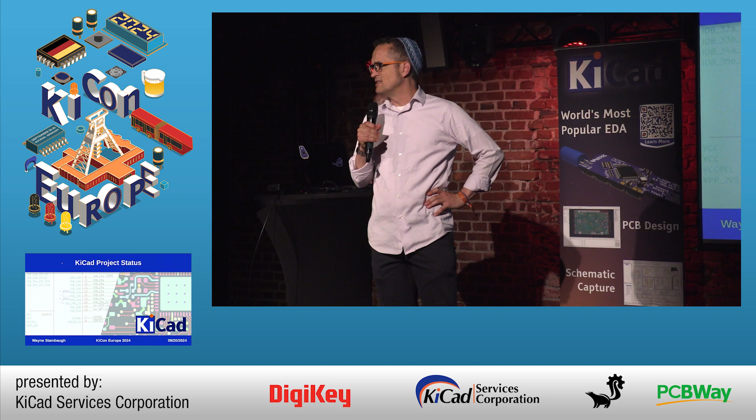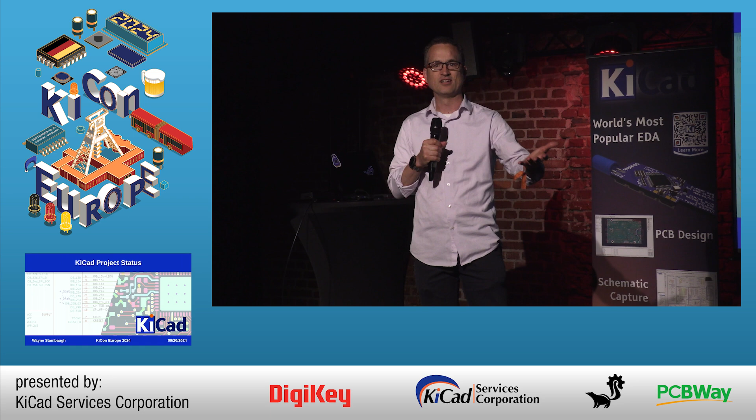Wayne is the KiCad project lead. If you saw his talk yesterday on bug reporting, I won't repeat the introduction, but I want to give a very quick overview. Wayne has been the project lead for a number of years. For those of you who are longtime KiCad users, you'll remember what the project looked like before Wayne took over and what it looks like today. This is not an accident. This is a planned and carefully worked on sequence of events that does not happen without a strong and competent lead on the project. The team, the community, everyone involved in KiCad is critical to their success, but without a leader who understands and facilitates this kind of interaction, communities can fall apart and disintegrate. So we have Wayne to thank for setting a strong, positive example for how to create a caring and nurturing community that can grow and meet the needs of all of us together. Please give a warm welcome to Wayne Stambaugh.

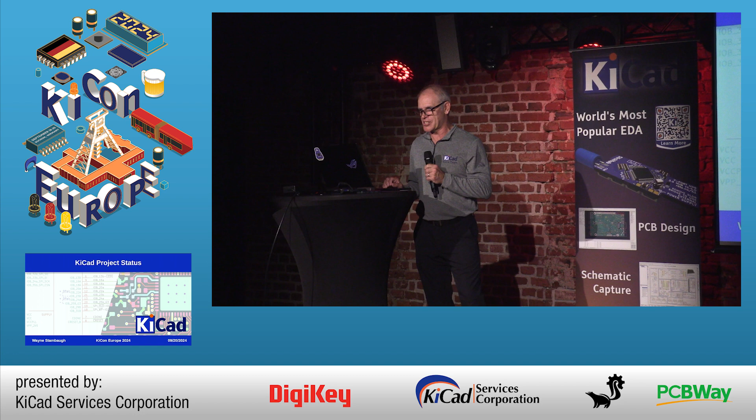Thank you, and thank you for the introduction, Seth. I'm not sure how much I deserve all that praise, but I do consider it a privilege to be in the position that I'm in, and I don't take that for granted. I think that's a lot of the reason why I've been able to do this for such a long time - I think it's now 14 years I've been the project lead. I really enjoy it, and I'm thankful to be here.

So today I'm going to talk about what's going on in KiCad. I've talked to a lot of you face-to-face over the last day, so some of this you may already know. If this talk looks familiar, it's going to be very similar to what I typically do at FOSDEM. The only difference is FOSDEM will be official, because by then version 9 will be out. We'll have probably a team meeting with the dev team to talk officially about version 10. So I'm going to talk about some of the features we're going to work on for version 10 that will be official. This list is just off the top of my head, so it's not quite complete yet - don't anybody panic if you don't see your favorite new feature on the list for 10.

So what's going on in the project? Unless you've been living under a rock, you know version 8 was released on January 31st of this year. That was the next major release in our annual release cycle. So version 9 will be released on January 31st, 2025, or within usually a few days of that. We had a year-end donation campaign and raised over $100,000 again this year, so that was successful again. That allows us to continue funding development and pay our development team to do their work. It also helps fund me to come to events like this, so I'm not paying all that out of my own pocket.

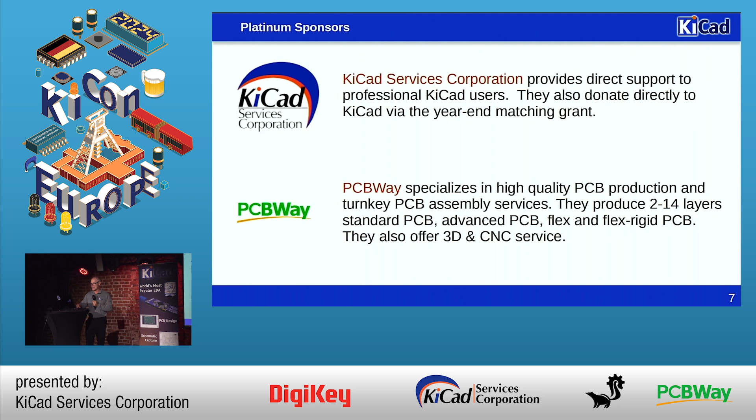So what's coming up for version 9? I want to talk about that a little bit. I want to first preface this by saying this is not a complete list. This is most of the major front-facing things that you would see as a user when you start using version 9.

This list would be 5 times longer if I included all the UI improvements, all the library improvements, all the documentation improvements that have happened during this development cycle. This is just a list of the highlights. Keep that in mind, because if you've used a nightly build, you'll be aware of some of this. Some of this you may not be aware of.

We talked about this a little bit yesterday with the Python bindings. This is an internal change - it's not front-facing, but it's a big change. We now have IPC support for the schematic and board editor APIs - it's a true API. We also have bindings for KiCad in Rust, and they're in their own separate repos on GitLab.

This one hasn't happened yet. I'm hoping it makes it in - one of our devs said he's going to get it done. One of the things we like to be able to do is let people reorganize their toolbars as they like to see fit. Right now, we don't have that support. wxWidgets has always been a little weak in that area, but we're going to try to get that in.

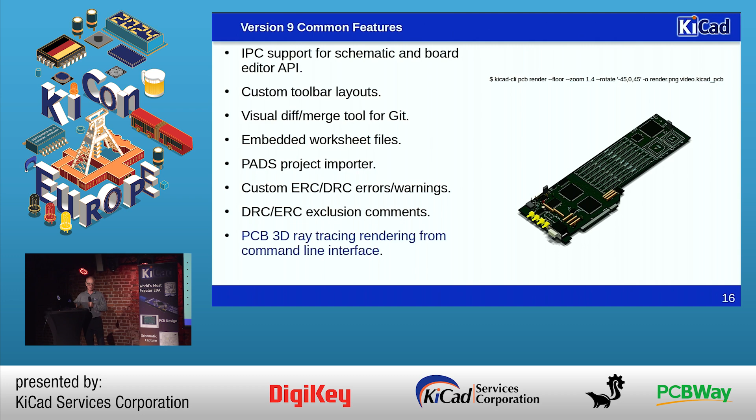So many of you are familiar with the command line interface. You can now do ray traced 3D models or ray trace 3D renders from it. Before you could just get the standard graphics, standard image file out. Now you can do the ray trace as well.

We now have a table editor, so we now support tables in all the editors: the board, schematic, symbol, and footprint editors. There's a table, and it comes along with a tool that allows you to do custom tables like you would be able to do in most other applications that support tables.

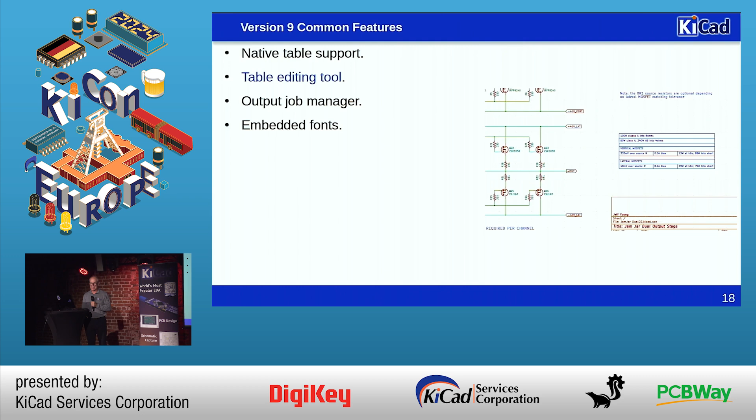This has been a long requested feature. The command line tools somewhat make this a little bit less needed because you can script, but some people like to be able to organize all their project outputs in a single place, click a button, and generate all your outputs in one shot. So there's going to be a new jobs tool in 9.

The other thing we've done is another thing that you can embed now are fonts. If you have a custom font that may not exist — the font issue has existed as long as computers with different fonts existed — if you have a custom font, on somebody else's computer you send them a document and you don't have that font, it doesn't render the same. You can embed fonts in all the files now. But like with the same caveat, keep in mind they can get rather large, so it's always going to be an issue.

So, schematic editor. What's new in the schematic editor?

There's now a synchronization tool, and you see it playing here. You can now synchronize the pins on a sheet with the hierarchical labels on the schematic, and it's bidirectional. So if you add a new port name to the sheet, when you open the schematic, it'll be there, and vice versa. You can delete them. So you have a single place, because in the past, for those of you who use hierarchical sheets, you know that you go down in your sheet, you add all your hierarchical ports, and then when you come back up to the sheet, then you place them. Now you can do it in a single place and they all get synced back and forth. So that's a handy tool.

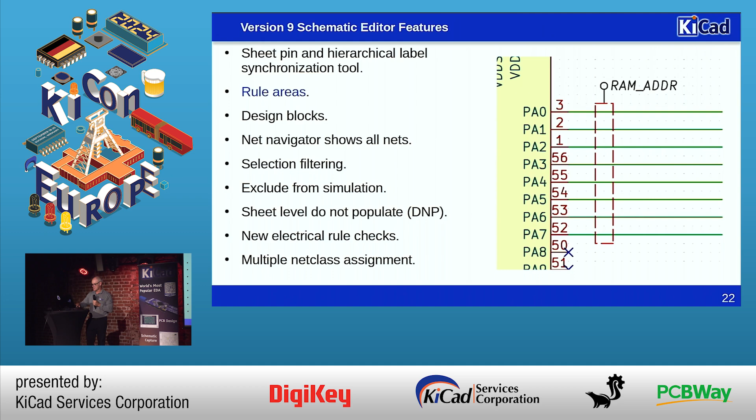Design blocks. This was just committed recently. You're going to be able to create arbitrary blocks of schematic blocks that can be arranged in a library, and then you can use those in all your designs. So you can have reference schematics for different pieces, bits and pieces. This is the first part of a larger goal — eventually those things are going to be tied. We're going to tie those to a block, a layout block as well for the board. So this is just the first step of that.

So originally the Net Navigator — there's a navigator that allows you to, when you have really deeply nested hierarchies with a lot of nets, follow the nets, which is sometimes difficult. Even if you highlight one, you have to navigate, and this allows you to do that. Originally it only showed the highlighted net. It now shows all the nets, so you can see the entire net hierarchy of your schematic.

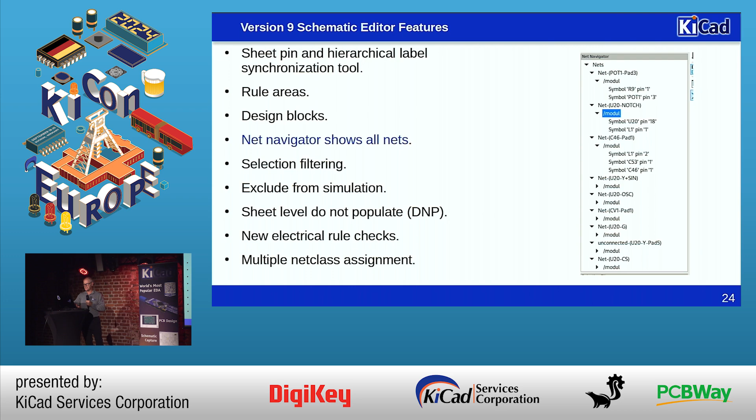There's now something where you can mark items to exclude from simulation. We couldn't do this in 8, but you can do it in 9. So if you have, say, a 0 ohm resistor that's just a jumper, you can say exclude, I don't want this in the simulation because it's going to screw up the simulation. You can do that now.

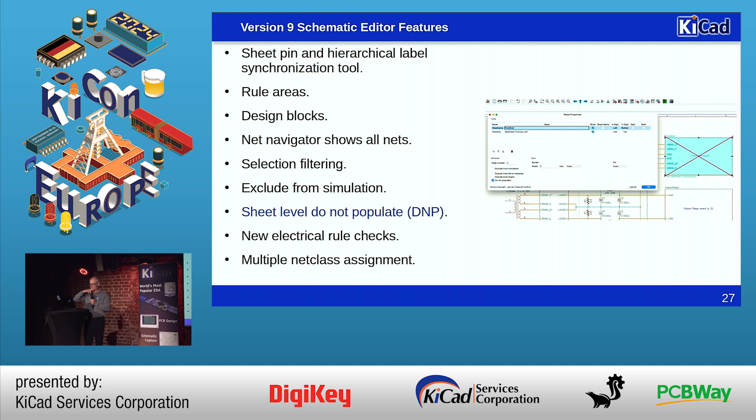You can do not populate at the sheet level. Prior to this, you could only do not populate at the symbol level. So if you had a whole sheet where you didn't want to populate that whole section of the board, you couldn't do that. Now you can just say do not populate, and you'll get the red X that shows up to indicate that whole sheet won't show up in the bill of materials.

There's a bunch of new electrical rule checks. We didn't have one for when there's identical names of local and global labels, so that's new. There's also one for unconnected wire endpoints. We used to have unconnected pins, but not wire endpoints, so those are new electrical rule checks that are going to be in 9.

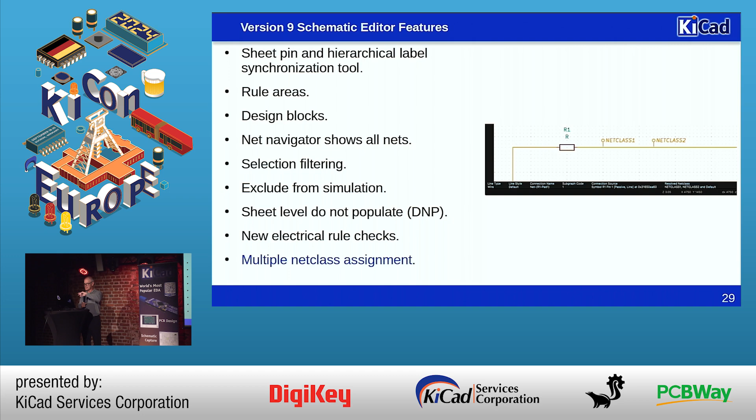You can also now assign multiple net classes to a single net, so you can progressively build different rules for a net. Maybe you have a sub rule and then a more complicated rule on top of that, maybe you want to use net class 1 for all your nets but have a tighter definition for maybe one net that differs by just one parameter. Right now in 8 you can only assign a single net class, and it'll complain if you put multiple net classes on a single net.

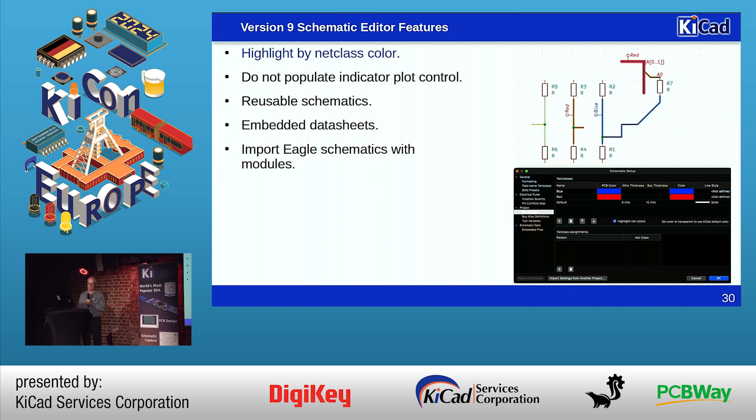There's also now highlighting where you can highlight a net class by its assigned color. So if you have a net class that has a custom color rather than the default, when you highlight it, it'll show up by that color.

You can also, when you plot, say whether you want to show the do not populate crosses on your printouts or not. That's new.

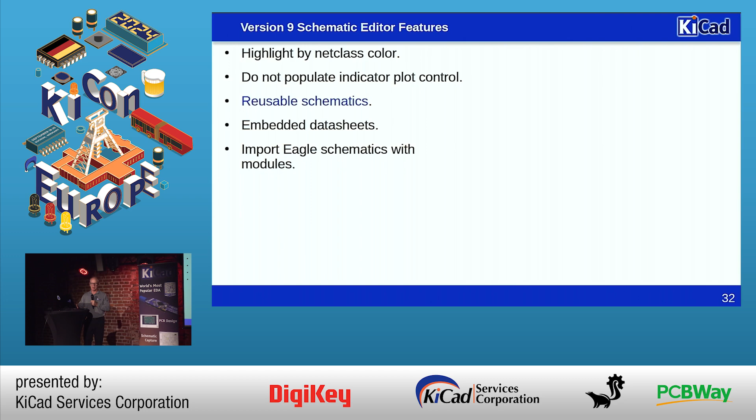Reusable schematics - I don't have a great picture for that right now, but that's coming. That's going to be a behind the scenes thing. We're in the process of doing away with sharing sheets the traditional way because it requires so much effort to maintain, and it makes a mess of the schematic files. So we're going to replace that with reusable sheets. It'll probably be pretty much transparent unless you use a lot of deeply shared sheets. Then things will probably be a little different for you, but for most people that will just be an invisible change.

You can now embed data sheets. So just like the fonts and the worksheets, you can embed data sheets in the schematic symbols.

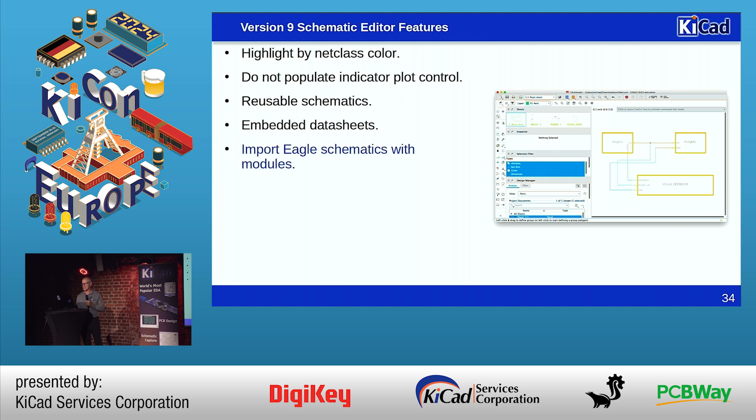The Eagle importer has been improved. In 8, you can't import Eagle schematics with modules - they won't import, it'll just ignore all the modules because it doesn't know what to do with them. But we redesigned the Eagle importer to make some serious improvements to it, and that allowed us to do the module import as well. So that will be in 9.

Tom talked about this yesterday - multi-channel designs. I'm not going to expand on that, he did a great job of explaining what that is. That's on its way into version 9, and it'll be available.

The last embedded files are 3D models. This one you really want to be careful with, because if you have highly complex 3D models, it will really affect your file load performance, because the 3D models are rather large. But you can do it - so if you want to be able to send your board file to somebody without having to send the external step files, you can embed them right in the board, but just be forewarned, the board will be rather large.

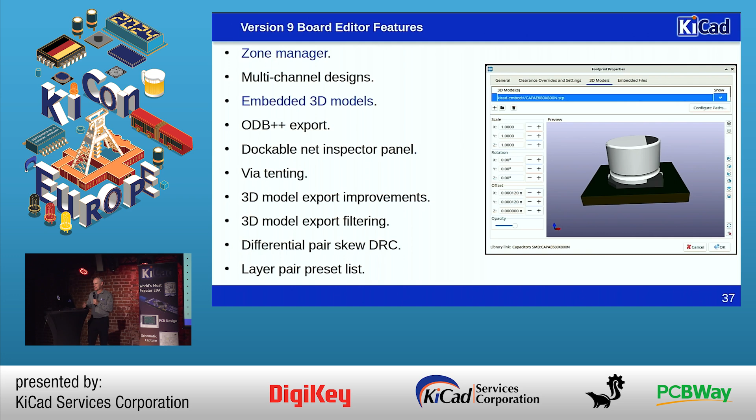I talked about this earlier - ODB++ export. This is now already in, so people can test it out. If your PCB vendor or your pick and place vendor or your assembly vendor require ODB++ format, we have it now.

The net inspector, which used to be a dialog, you can now dock as a panel, so you don't have to deal with the dialog, keep moving it around while you're trying to look at stuff.

That's a big improvement. We now have much more granular via tenting, so you can define via tenting on one side or the other side or both sides of the board for all the vias, and then you can do it per via. So if you have individual vias where you only want tenting on the top but not the bottom, that kind of granular control might or may not be important, depending on your design.

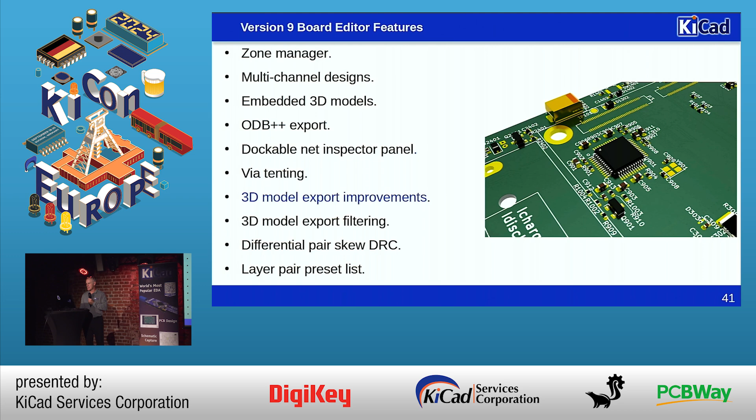There were a lot of improvements to the 3D model exporter, including, as you can see here, nice silk screen and fancy solder mask exporting. When you export your 3D models, you can now filter which models you want to include. Maybe you don't want to include some because they're too large, or for whatever reason, you can filter out which ones you include and don't include.

There's now a differential pair skew DRC check. This doesn't exist in 8. We know we're still fiddling with the skew stuff, so we added a DRC error to do a better job of telling you when there are issues with that.

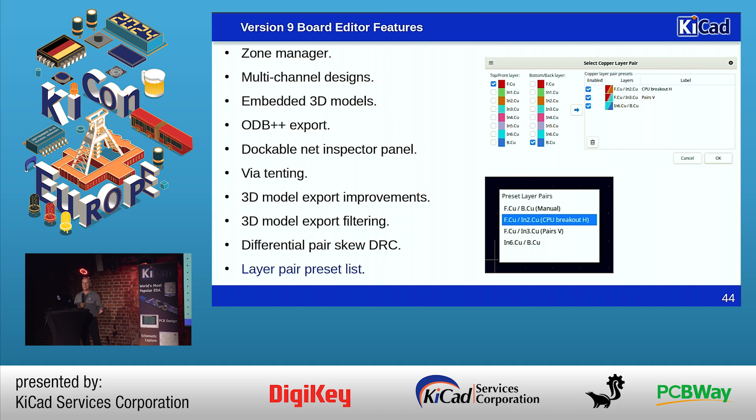One thing that was recently committed is that you can now make preset lists of layer pairs. So if you're doing a lot of stuff with blind and buried vias, you can set up a layer pair list that you can scroll through as you're routing. Maybe you want to route from 1 to 3 using a blind via.

For those of you who know, you can't route squares because there's no such thing as a square routing tool, every route will have some radius on it, so you don't get sharp corners. There's now a tool that lets you edit cutouts for your board with what they call dog bones, matching whatever the radius of the cutting tool is, so that rather than a square you're not going to get, you can add the dog bones to the shape so it represents what your routes actually look like.

You can now use an arbitrary reference for the relative position tool. Before, you always did things relative to some fixed coordinate that was already selected. Now you can select an arbitrary reference for that.

We have cursor snap indicators now. This was a feature that was also just recently added that's really nice. You can actually see the cursor, you can see the indicator as you go to the different snap points, and it'll show you a snap indication of where you're going to snap if you click on that point.

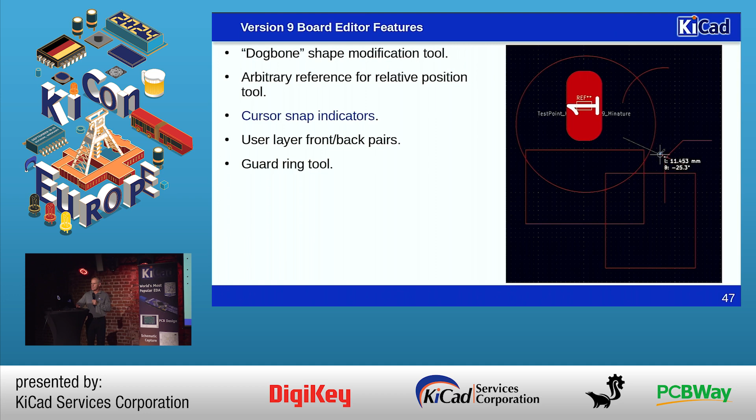User layers were always on top, always positive. We now added a way to define this, so if you take two user-defined layers and set one as back and one as front, the back layer will be mirrored just like the back layer of any other bottom layer - you get it reversed or mirrored.

There's also a guard ring tool. It looks like this will be an extension of the zone tool. You can kind of do this now - draw arbitrary geometry and assign a net to it - but this will be a cleaner tool that allows you to create guard rings, which we currently don't have.

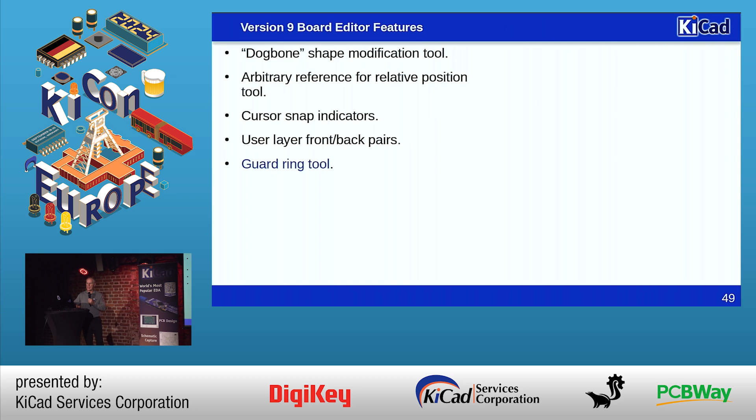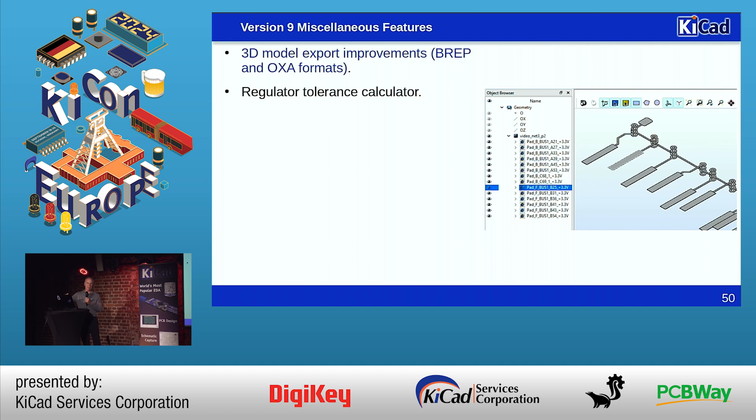In miscellaneous news, somebody stepped up and provided wire meshes for the 3D model exporter. Here's a wire mesh of internal copper in KiCad - it's like an edge connector - and I think this is actually running in an EM simulation tool. The first step to get to EM simulation is you have to get 3D geometry into a mesh that's universally accepted. So if you use one of the EM tools, you can now export those as BREP and OXA formats.

Somebody added a tolerance calculator to the regulator tool — our calculator tool just used the fixed nominal value. Now, if it's 1% or 5%, you can see what your tolerances are. Maybe somebody will add temperature coefficient too, so you can run it over temperature. I chuckle when I see that, because at room temperature that's what the tolerance will be, but that won't be the tolerance across the entire operating temperature.

So that's what we have in store for version 9. Version 9 was a slightly different dev cycle — I think we had a lot more features in V8. Some of these features were a lot more complex though, so it looks like we did less. It's not necessarily true; some features required a lot of retooling under the hood, and those changes tend to be a lot more invasive.

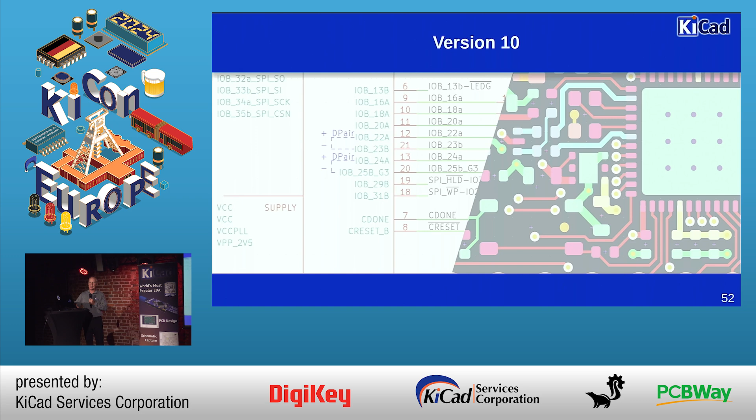So what do we have planned for V10? Take this with a grain of salt, because this isn't official just yet.

As many of you have noticed over the years, KiCad is migrating away from everything being a standalone application toward a more project-centric philosophy. Your project files have a lot more information in them than they used to, and that's only going to continue to increase. So we'd like to move to a tabbed user interface, a single main window, and be able to open multiple projects at the same time.

We really would like to have a multiple document interface. I think that's been on the radar for a while — we've been restructuring code to allow us to do that. Whether that happens in 10 or not, that's a tall order, but eventually we're going to be there. And when we do that, that'll be the end of the standalone editors — opening a schematic will just be like it is when you open it as part of the project now.

Design Migration Wizard — right now we have a hodgepodge of third-party importers, each with a slightly different way to do it: the Eagle import, the Altium import, Pads, and others. In the future we'd like to have a common interface for all the importers. Importers are important because there's a lot of people out there with lots of legacy designs, and it's nice to have a way to import them.

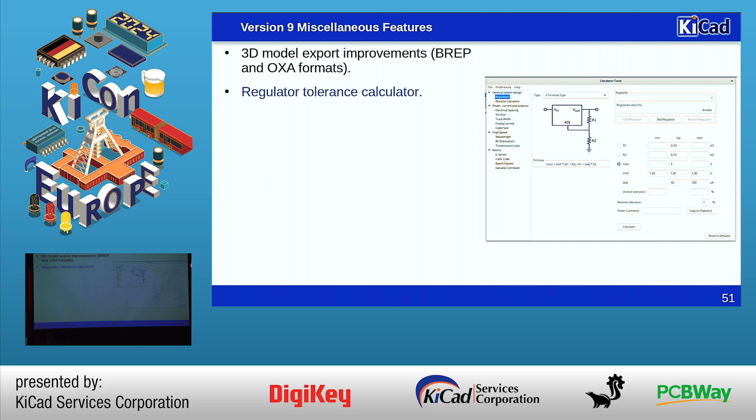Regarding that routing or milling tool, can you please go to slide 45? The dog bone tool? Yes, exactly.

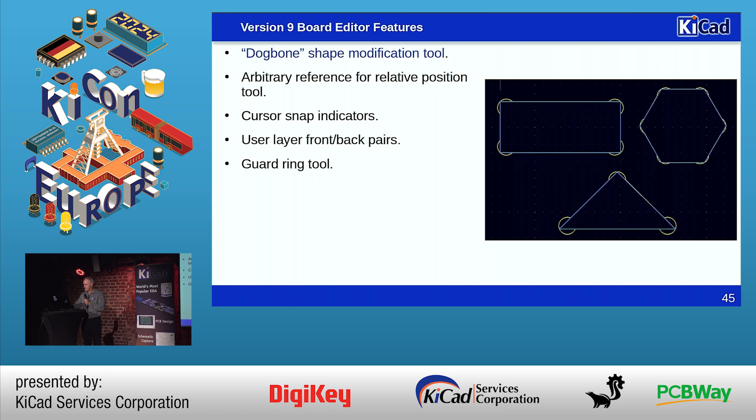Would there be separate content for the US and Europe KiCons, so that people like me who can't get enough of it can attend both and get something out of it? Well, that depends - it really depends on the people who step up and do presentations. But I suspect there'll be some overlap, like this, since I do the keynotes about what's going on in the project. That's typically what people want to hear about from me.

But the individual presenters and content - some of the content here I saw today was completely new, right? So it all depends on who steps up to present. There will be a lot of deviation because people use KiCad for all kinds of things, and I'm always amazed when I hear somebody's use case.

I remember talking to the Libre Space guys a couple years ago at FOSDEM - I happened to be walking up to get the bus back to the hotel, and they saw me and came over and showed me one of the little CubeSats they had, and all the boards were designed with KiCad. This is up in space! So it's fun when people present stuff like that - all the different uses of KiCad. It covers a lot of ground.

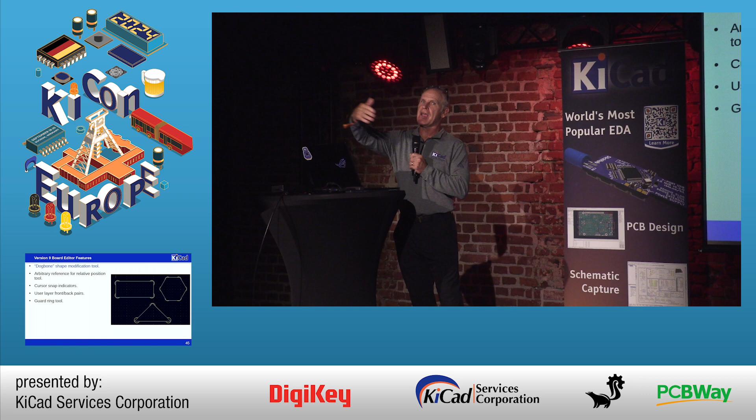So just to throw this out there, if you're doing something different, like the modular stuff that Odin just did, that's great - that's the kind of stuff people want to hear about. If you're doing something unique or a little off the beaten path, please step up and do a presentation.

We love it when we get new presenters at the conferences, because that makes them more interesting. If we all came up and did the same thing, it would die on the vine. So if you have interesting content you think people might want to hear about, let me know, or sign up for a talk when the next conference comes up.

Regarding the IPC transformation, will we still be able to use or do command line applications using the pcbnew Python module without a running instance of KiCad? No. That's a pity. No, okay. The scripts don't need Python.

The command line interface does not require Python. But if you have custom Python scripts that use the pcbnew module, that's going to go away when we deprecate it. You've got some time to convert over, but yeah, IPC runs on a running process.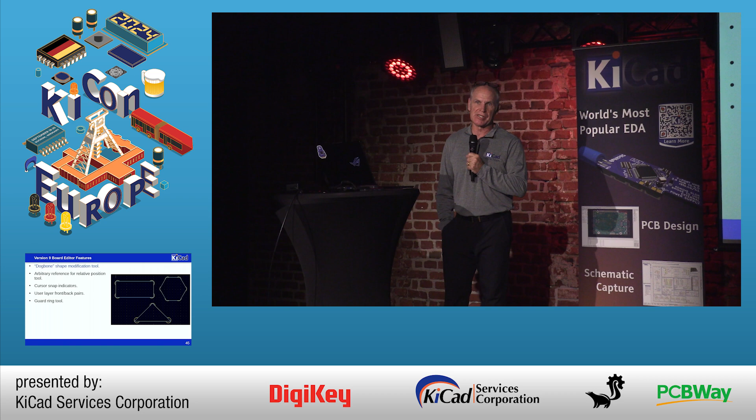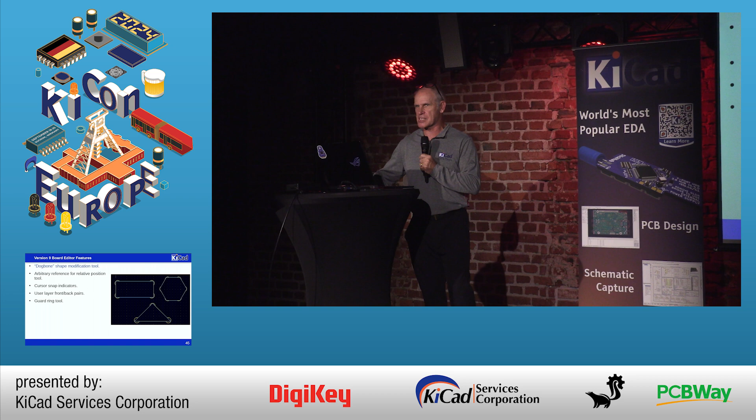Then maybe we could access the shared library through the IPC feature, but I don't think that's possible right now. I think we're going to have some work to do to get there.

Wayne, question about the larger file sizes from embedding data. A lot of applications, if you add information the file increases, and you remove the information, the file doesn't decrease later. How did the KiCad project handle the increased embedded file sizes?

Seth, that's not true, right? If you remove the embedded file, it's just gone. Other projects, if you remove the embedded information, it still exists because of how they do their caching. For KiCad, no, you remove the file, it's gone, the file size goes back to the original.

And the file size increase is modest because step files compress really well. So if you try it out, you'll generally see a step file on a model is going to increase it by a couple of kilobytes, maybe, not so much at all.

They're still represented as text data in the models themselves, so yep, they do go into your Git repository without requiring a binary file format. But the overall size — we compress them before we transform them to base 64, so they're not terribly large.

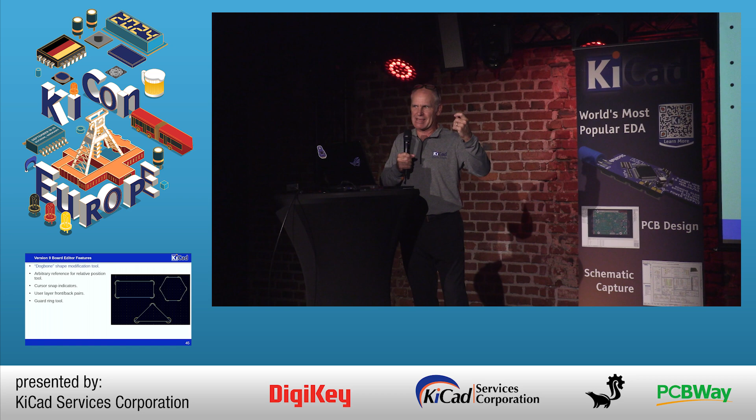We've made a lot of improvements in that area over the years, just by the fact that you can assign any color to a wire, and make it any arbitrary thickness, so you can make it look nice, more like a wiring diagram. But we're not really set up to be a pure wire diagramming application.

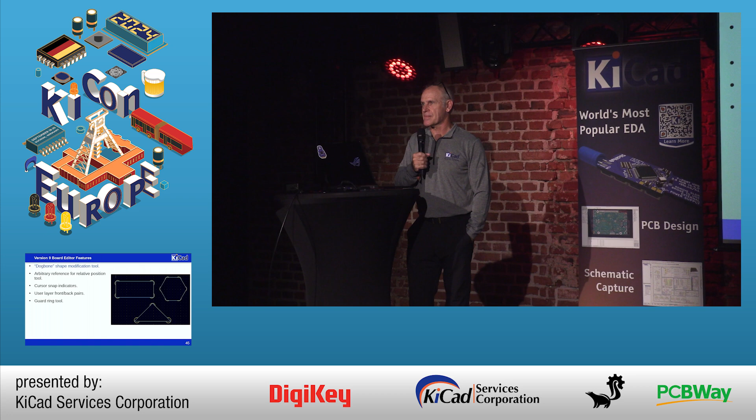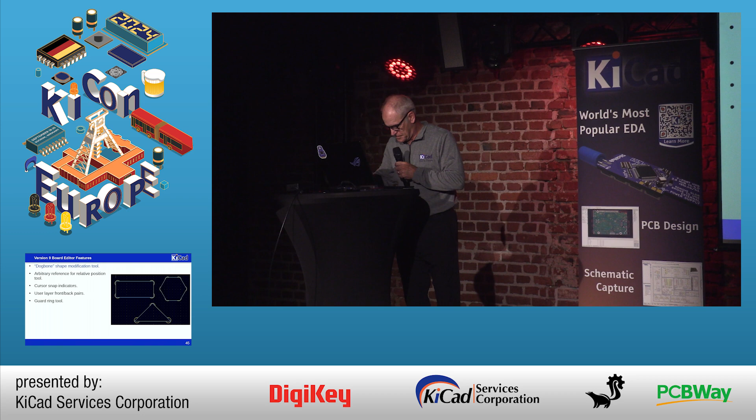Is there any plan for an output wizard to combine all the production files under a combined setting, making it easier to go through the process for multiple revisions? That was one of the things -- hang on, I hate laptop keyboards.

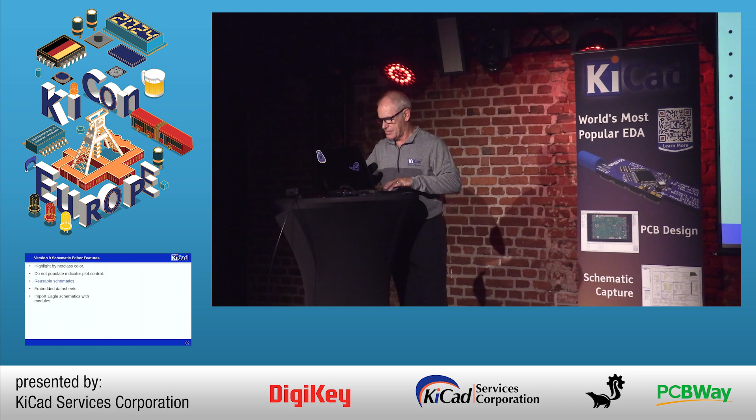It was one of the output jobs. It was up here somewhere, at the top, in the common section. Hang on. Oh, output job, oh I went past it. Sorry, the response is a little slower.

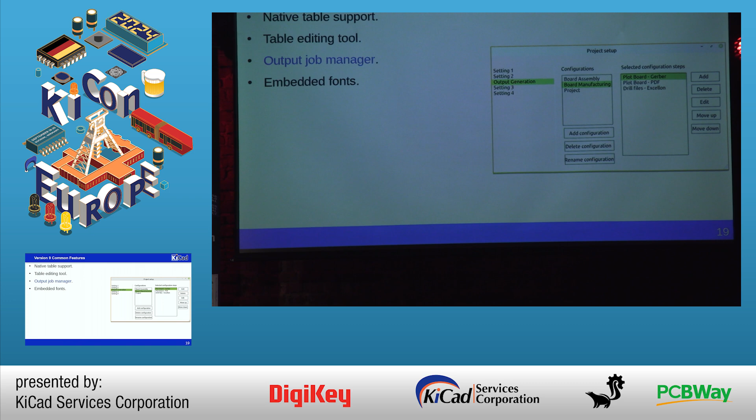What you'll be able to do is create a group of outputs, plots, maybe step files, whatever production outputs you'd normally do one at a time, whether you script that through the command line interface or just plot -- maybe export the step model, maybe export PDFs for doc control. You'll be able to create a job, which is a list of all those things, and you'll just hit run job, and it'll generate all those outputs for you at one time.

You'll be able to create multiple jobs. Maybe you have a job for board manufacturing stuff, print all of that and put it in an archive to ship to your board vendor. Or maybe your mechanical team needs the step file and all the models to put it in an enclosure, so you'd have a different job for that. You'll be able to create multiple jobs for each project -- that's what the output job manager is for.

Currently there is a plugin called KiKit that can do panels from individual boards. So if you have one board and a description of how you want to transform it into a panel, will this be something that can also be included in the output job manager?